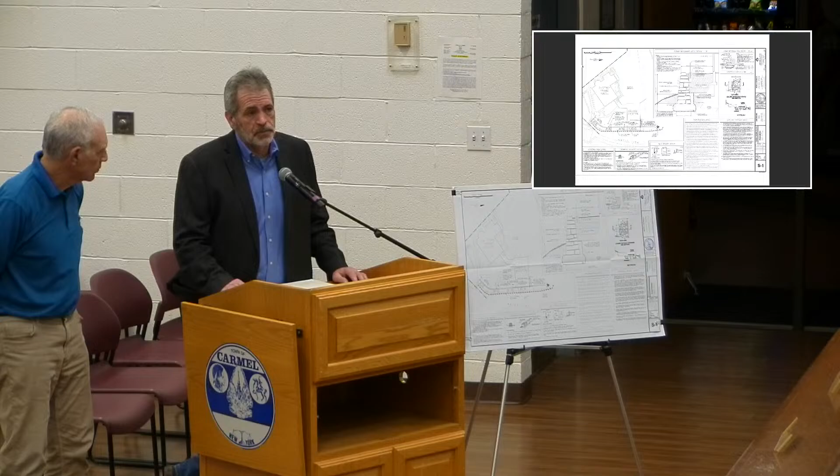Did you, under this original application, that we were supposed to put in a rain garden or something, or you were putting in Cultec, or what were you doing? We were not the original engineers. The original application didn't have any real drainage subsurface. It had some riprap and swale and surface water detention areas to slow the water down.

Okay, so the original engine— oh, wait a minute, here it is, hold on. Here's another one. Here's one. Just hold, give me a second, all right? No problem. What? I was not here on that night. First meeting in April. So I don't know. Going through these.

Girolamo. Jack Corral was the original engineer? He was, yes. Looking to build a two-car garage in the rear along with a breezeway connecting the house.

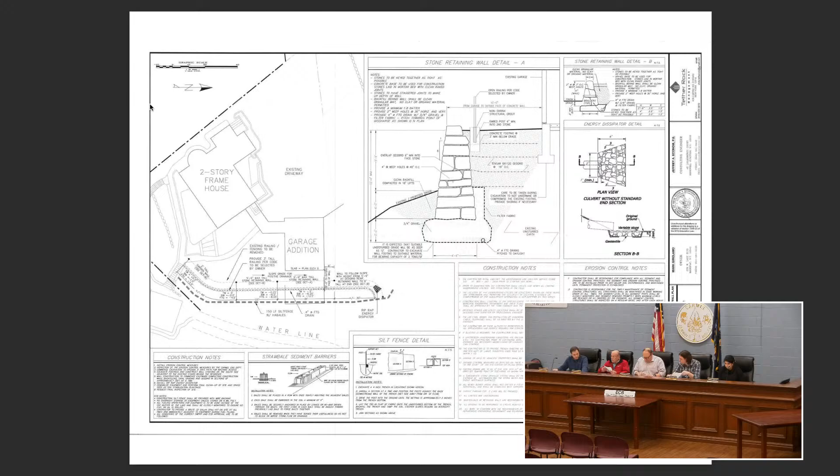Green line is the lake water high mark, blue line is the 100-foot setback. Roof infiltration detail is here. There's a trench drain that we're putting in front of the garage doors because they have an existing problem with drainage coming off the driveway. Chairman Laga asked if they were in the 100-foot buffer to build this.

Mr. Krause said yes, the breezeway and the garage are within the 100-foot buffer. What's the area of disturbance? Mr. Krause said the area of disturbance is 2,000 square feet.

Technically, we don't have to do any treatment since the disturbance is under, which is correct. But you're adding surface area of the roof, so you're going to have to provide us with either a rain garden or some sort of water infiltration. Mr. Krause said that's why I'm doing the infiltration trench.

It's a 4-foot deep trench filled with gravel that will go alongside the garage and up along the side of the breezeway. On the other side of the garage, the trench drain will pick up the water coming off. Chairman Laga says there's going to be a perforated pipe coming off that trench. No, it's an infiltration trench. It will fill up and overflow to the riprap outlets on both sides of the garage.

Is that still in your plan here? Yeah, we're not changing anything from the original application. So it's effectively a curtain drain. Right, well, I'm just reading the notes. Yep.

You took down 2 trees, existing driveway, about 100 square feet of pavement. You were here.

What day was this? So this was back in March of '22. Correct. We had to apply for an extension.

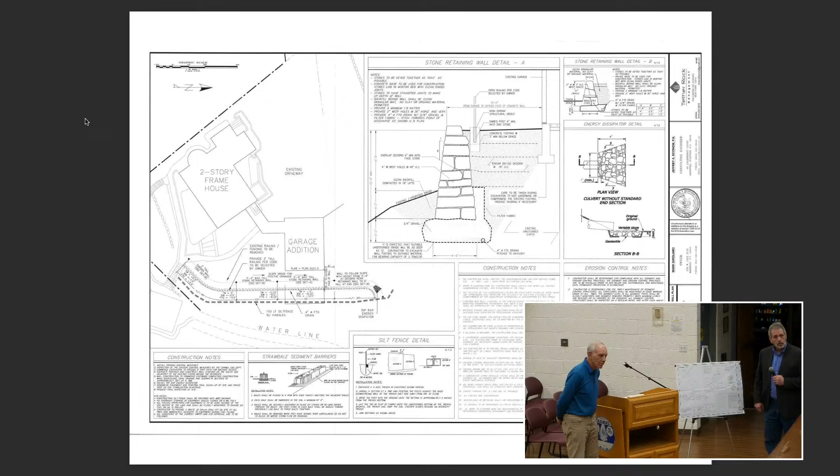I'm fine with it, but here's what we're gonna have to do, right? So you're changing the grade of the property to add the wall, and you're gonna have that area. If I take that line in front of there and follow that up somewhere, you're filling in that amount of area with soils, right? Correct. Okay, so what I need to know is then, so we're changing the area of the lake.

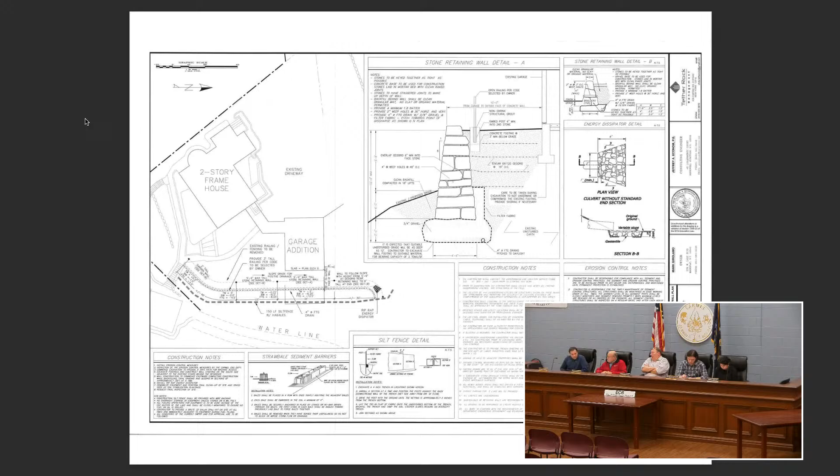You're gonna put weep holes, obviously, in this thing and stuff. Correct. So what I'd like you to do is this: I don't have an issue with the installation of this wall. However, what I would like to do is, since we are well within the 100-foot buffer, I need some sort of mitigation.

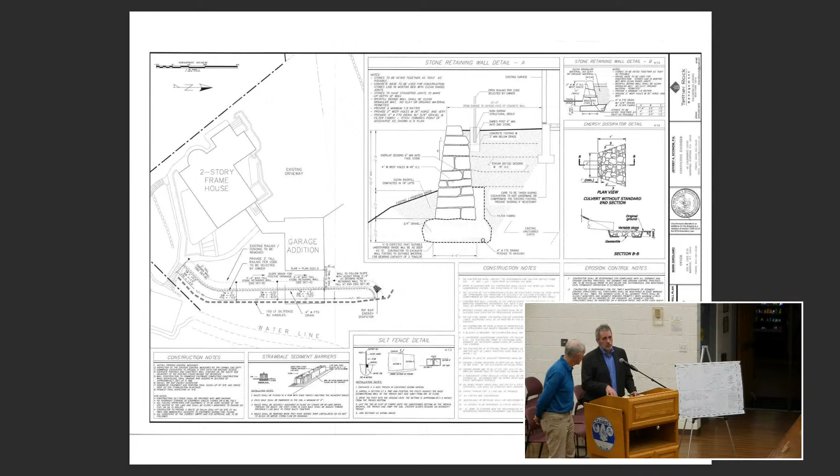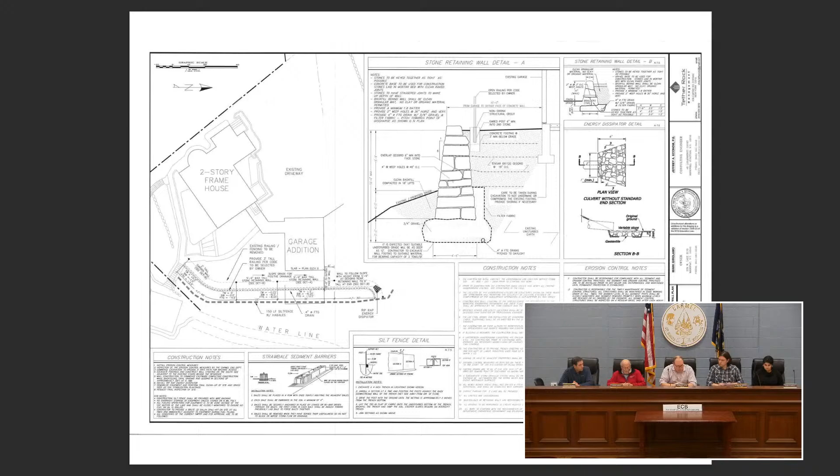Okay, so what I'd like to suggest to the board is this: his plan right now is to backfill this area, right? So what I'd like to do is have this area of disturbance considered as an area of disturbance, and then I would like you to figure that out and either put in a rain garden or some sort of mitigation, because you're right on the lake.

And that's the main thing we have to protect here, right? So, is there anything that he can put in front of the wall here, in front of the weep holes or something along those lines?

I wouldn't dare to, because in the worst case you have a surcharge of water behind that wall. You're gonna have it structurally sound with the materials, and then if you have a hydraulic charge behind it, I'm afraid over time it'll just go like this.

We're putting in footing drains and trying to pull any water that, if it does build up in there, it's pulling out. So what we'll propose then is infiltrators at the bottom of where I show riprap, at the end of the pipe run, at the last part of the wall.

It will be in the buffer of the lake, but at least it's providing subsurface retention for mitigation. And what kind of fill are you bringing in? Clean, granular material, you need drainage to give us that. You need to provide us with a letter certifying that the fill is clean.

So for number one, you're going to provide calcs or a proposal to mitigate the wall and fill, okay? Stormwater calcs and mitigation for drainage. If you're going to use a rain garden, base it on the 100 feet of wall by the width, you know what I mean? It's the simplest thing to do. Plus the fill that you're doing, the area is just a triangle, more or less.

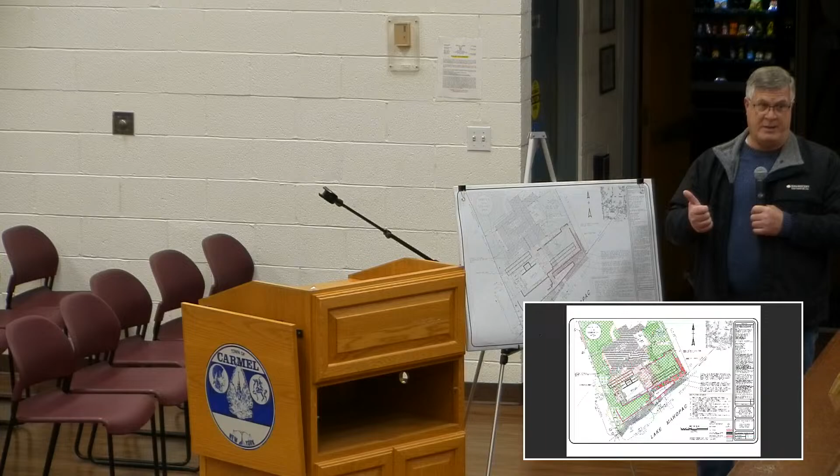This has not been built yet, correct? Yes, it is under construction. We had permits for it. For the pool? For the pool and for everything.

And I sat down with Mike, and I sat with the town engineer. Right, Rich? Yeah, and the engineer wanted to review the calculations. He has subsequently reviewed the calculations and agreed—he wrote an email to Rose and to myself that they were satisfactory. The rain garden only picked up a 3-year storm.

If you see what I did here—it also said on Mr. Frederickson's plans that there were dry wells on the property that all the roof leaders were connected to. There was not one dry well on that property. They all open-discharged to the lake. If you look at this hatched area on the roof line, I've taken over 80% of the roof of that structure, which is over 5,600 square feet.

I put it into these Cultec systems designed for a 25-year storm, so now you're getting infiltration and water quality for almost the entire roof surface that was open-discharging to the lake. The Cultec is over there—those square, rectangular areas are Cultec. Wow.

So, to my understanding, it sounds like the project plan previously presented here had approval for installing the general features on this plan, including a pool and a deck. That hasn't changed, but the problem ended up being the grading—in order to get these features in, you needed to grade the property and tier it. And in order to properly do that, it sounds like you've also added a considerable amount of additional limited disturbance.

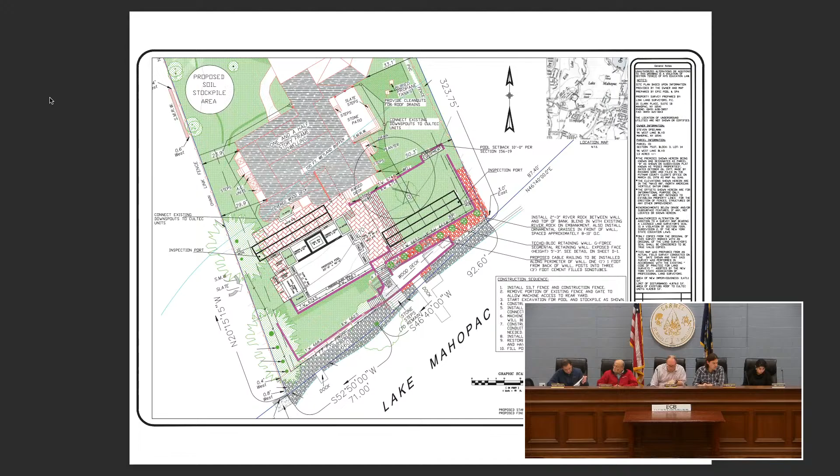That's correct. Okay, so the river rock in red—that's new. The stuff that's gray—gray was existing. So I've given an additional buffer to the lake. I'm going to plant ornamental grasses in front of the wall for a little more infiltration, but also for aesthetic purposes along here. None of the walls are over 6 foot.

I wanted to stay within the town code. And the pink, the magenta lines—that's the retaining wall? Yes, new, which wasn't there previously. The limit of disturbance on this project increased by 76 square feet compared to what was approved under the Rob Keeler plan.

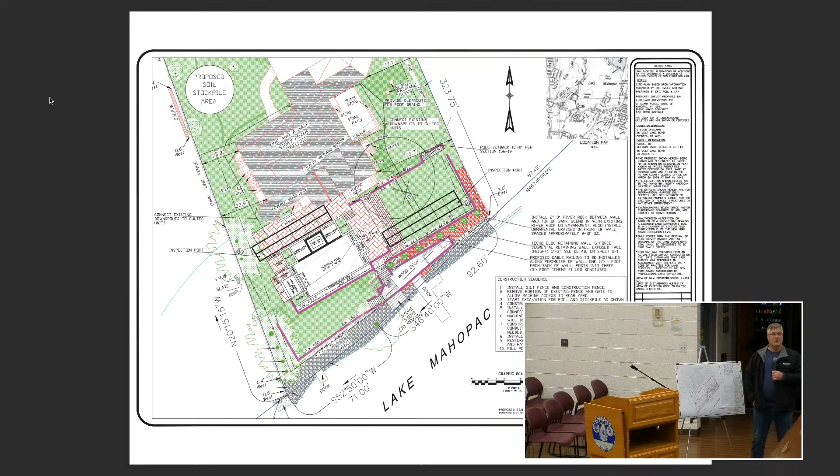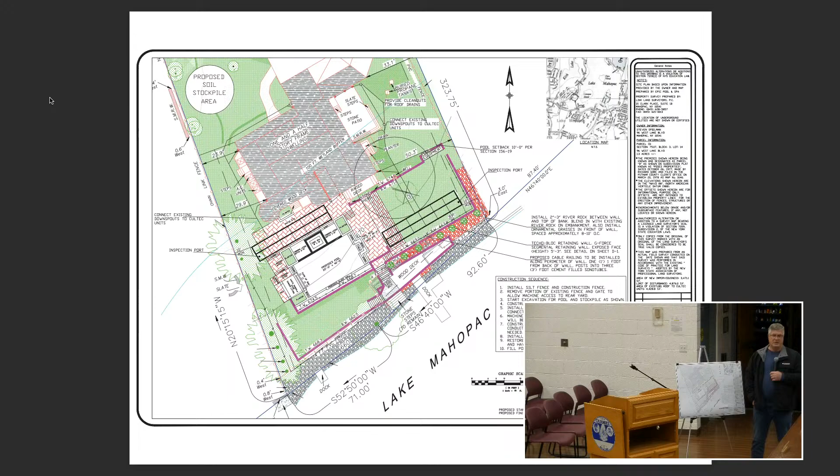Is this permit still active? Yes, it is—it's been renewed. Mr. Spielman just recently renewed that. And I did ask, after getting the approvals, the building inspector, you know, he says we issued you a permit. And I've known Mike for years.

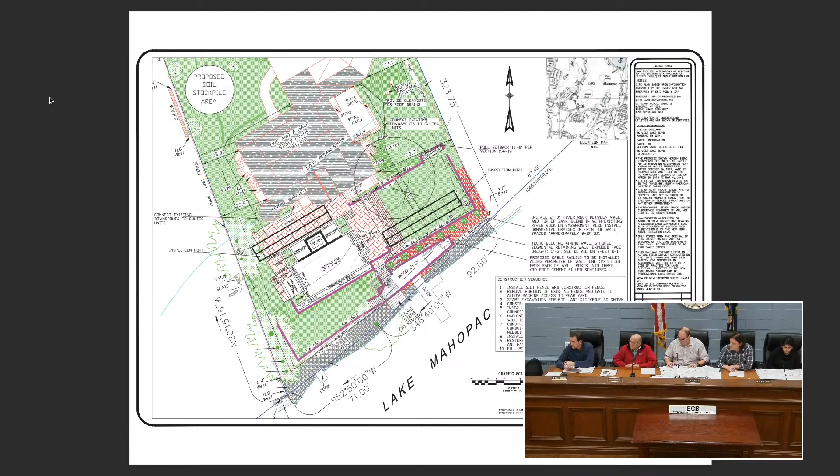I actually just retired after 33 and a half years in local government. I worked in Yorktown for 20 years. I'm familiar with EnviroCert International, CPESC certifications - that's the erosion sediment control and water quality certification, it's international. I was actually the first chairman of the board for the international certification. We're known throughout the world. I actually taught in China. This is sort of my specialty. I have a bachelor's degree in civil engineering, environmental, and my master's.

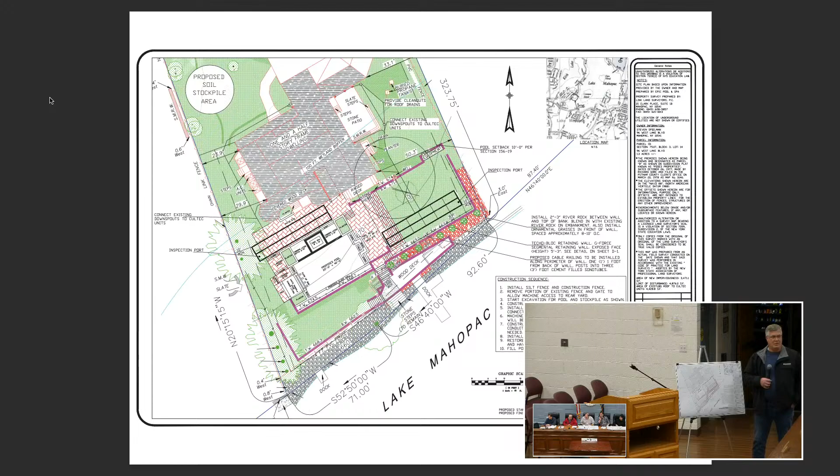This is my specialty, trying to do this, and I actually teach stormwater to the building inspectors. I'm a certified building inspector, and being that a lot of them are the MS4 officers for the municipality, there are things they need to teach. So I do help, and this is one of my backgrounds.

So, the two Cultec areas that you're having - those Cultecs make up for, so you're saying the whole total area of disturbance was a net add of 76 square feet? Correct. I assume that's probably just the size of the retaining wall, or the amount of retaining wall we have. Where did that 76 square feet come from? It's around the retaining walls, but if you look at...

Yeah, but when you dig in the Cultec, that's considered disturbance. This was already previously disturbed, from the house down here - this whole area was previously disturbed. You're talking about this little bit here, extending it further down because of the tier walls that are there. It's within the footprint of the previous Frederick plan. If you look at the limit of disturbance, there was no way that was an accurate limit of disturbance with a 6-foot grade differential across the pool, and it was only 4 foot off the edge of the pool was a limit of disturbance. It just physically cannot work. So, I did take a close look at this.

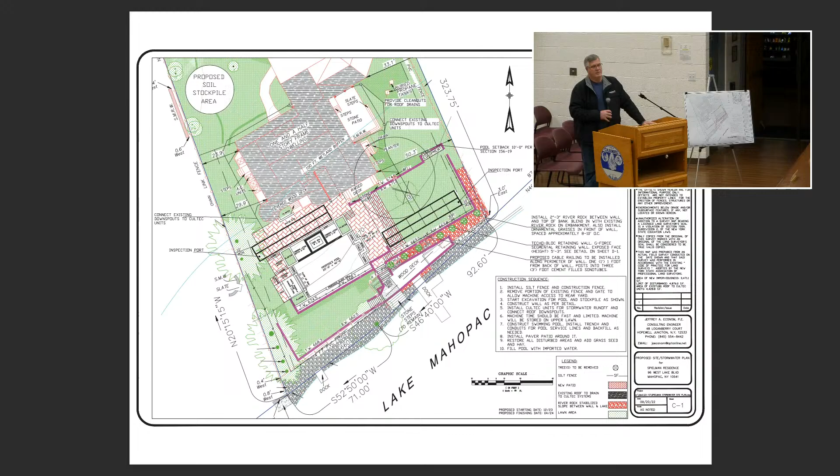It's a fait accompli. All right, so then this is what I'm gonna do. We're talking gravel and...

Just so you're aware, one of the conditions as well is prior to removal of any erosion control measures, since you're the new engineer on the plans, make sure you're talking with Rich Franzetti, town engineer. He has to review that before you pull them out, once it's all stabilized. Correct. Yep, got it.

See, these drawings were done back in September, so that's what I'm really having, and as being a former town engineer, when things go not so the way they were supposed to. Well, the unfortunate thing is the general contractor that I gave the drawings to.